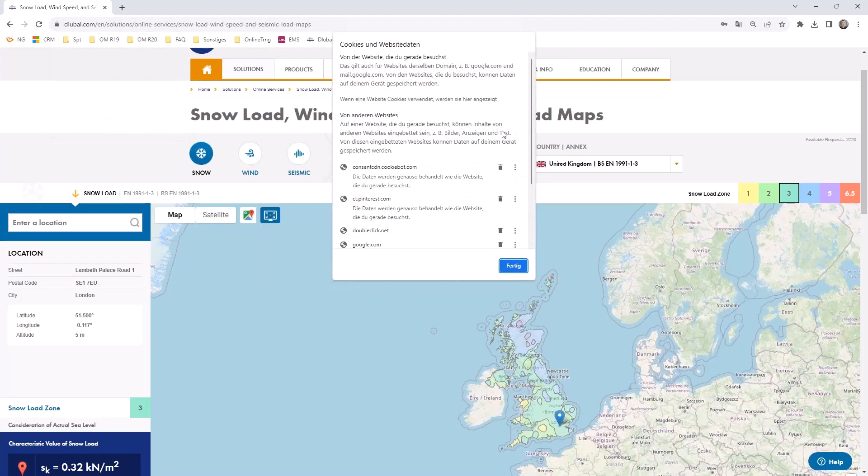So this is of course some data which is saved on the computer to quickly access a page, but it might be necessary to reload it. And then you can select if you want to allow all cookies again. And then the frame should load again for you if it did not do before.

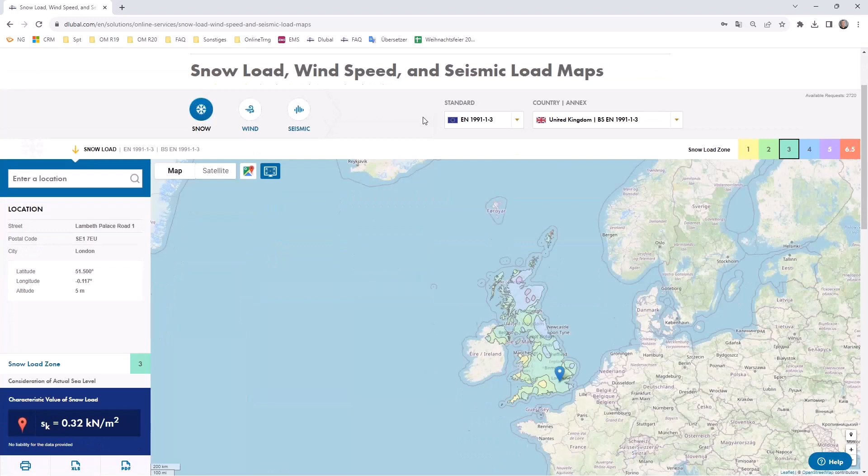So let me quickly sign in so that I will have enough requests for today. And let's go again to the snow load map. So I think you're already coming to it. It is not available yet for every map. I do not think that it is available for Great Britain. Oh, it is already. In my tests, it was not available. Okay, so we can use, for example, Great Britain with the Eurocode 1991-1-4.

And then you see the small button on the left bottom of the page, which is of course still announced as being a beta. So please double check the values if they are correct or not. You can of course do that in RFEM, or at least be suspicious if they might be correct. It's still in a beta mode, but we do not want to not present it. So you can think about using them.

So if you once click on the button, you can already see the three diagrams you can now gain. So it's not only about the basic wind speed. No, you directly jump into the map and parameters according to the Eurocode, and it will create the diagram over a certain structure height. So if you adjust it to 20 meters in here, you would see that the diagram will of course be adjusted, and you can as well jump into the wind profile tab in order to copy paste the values with the level.

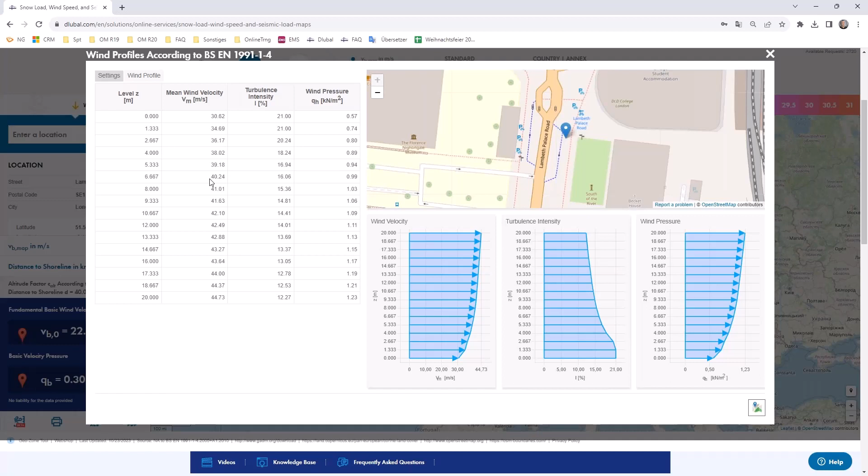What is then of course necessary if you jump into the RWIND main program for the definition of the wind profile and turbulence intensity profile. You can as well choose that you want to have a user-defined definition and adjust all the values you see in here. You also get a closer look on the place where you are. You can also switch off the map if you rather want only a big display of the diagrams.

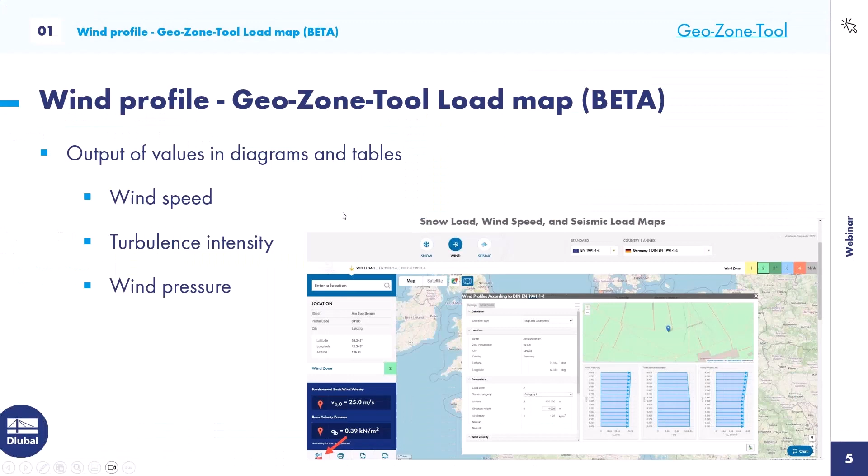So just once to remind you again, it's still in a beta phase, so it might not be available for every standard we provide, but this might be quite useful for you if you use RWIND without RFEM 6, or if you want to compare your hand calculations, or if you want to compare our calculations and tell us something might be wrong or not. So this was something not directly linked to RWIND.

So let's now jump into the main part, of course, our program RWIND, and this is my summary of the 4 features I would like to mention. Maybe you are not yet used to it, but you can also find all the data in our extranet. So if you log in with your account and you go into the development tab on this page, you can see features and also bugs. And this is most likely the place where you can inform yourself of what is new or what was fixed.

And if you then restrict it to RWIND, this is in German, depending on the language which is set in your account. You can see that these features were introduced into the 4th version or the 3rd version and so on. And you could also check the bugs which were fixed for the certain files.

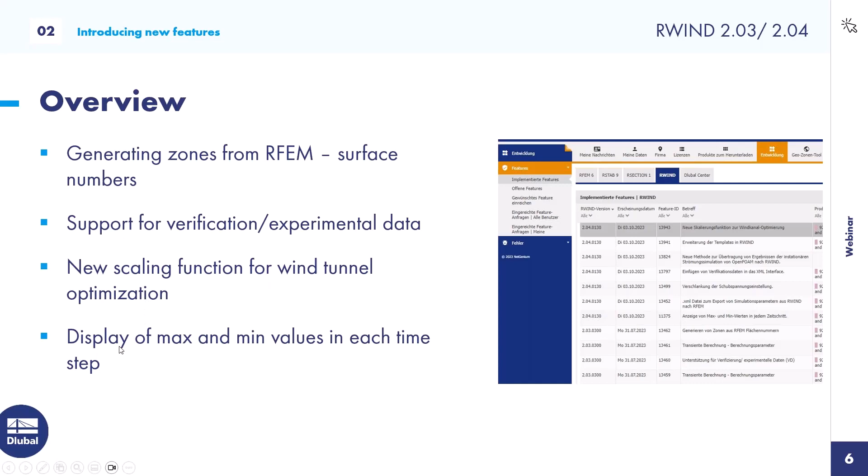So what I would like to talk about now is the first feature, the generation of zones from RFEM surface numbers. The next one will be the support for verification or experimental data. This will be the main part of today's webinar. The next one is a new scaling function for the wind tunnel optimization. And last but not least, we will quickly step into the display of maximum and minimum values in each time step. I have one slide for each feature, and then we jump into a small file in order to check where you can find it.

So you are now able to generate zones directly from RFEM surface numbers. Of course, only if you use RFEM 6 and then hand over the model to RWIND. We will now also hand over the surface numbering, and then you are able in the edit part of RWIND to generate zones from surface numbers.

So each surface, which you can of course split as much as you want in the RFEM main model, will create a zone, and remaining objects, so you may of course also hand over members, they will also have triangles. They will be assigned to zone 1. So of course that's a bit of a complication that they are assigned to zone 1.

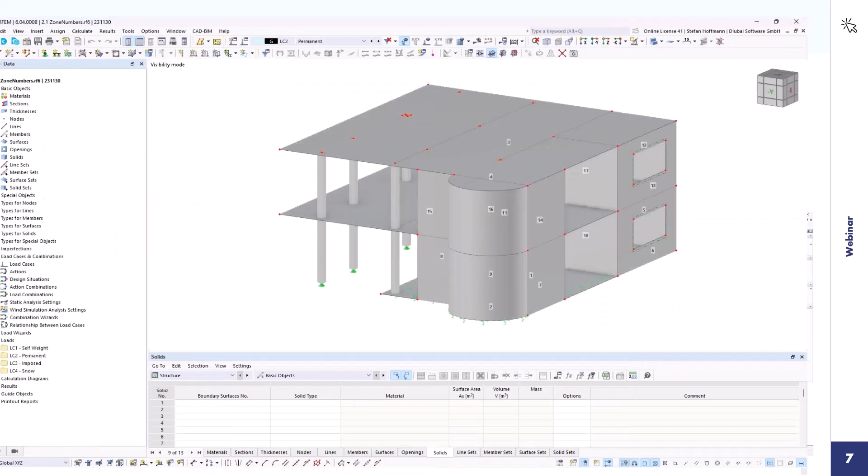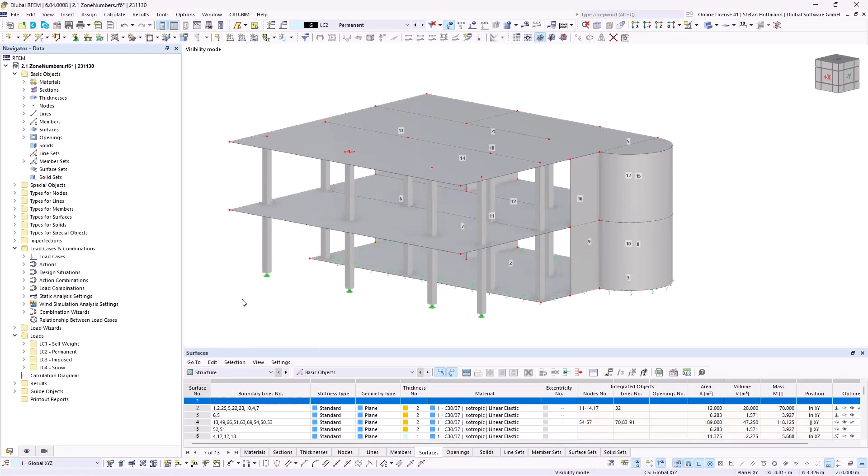But if we now step into my example file, which is also installed, it's the concrete building where I switched on the surface numbers. You can see that we have a surface number 1. And if you do not want that 1 also includes the member triangles, you just have to once go into the table and insert a row. So the surfaces will not start with 1, and all other things should be synchronized in the back. And now we have only surface numbers starting by 2, and all other stuff may be handed over to zone 1. If this is not fine enough for your differentiation, we will also see it in the main example later on. You might also right-click and divide surfaces with intersecting lines in order to create more zones.

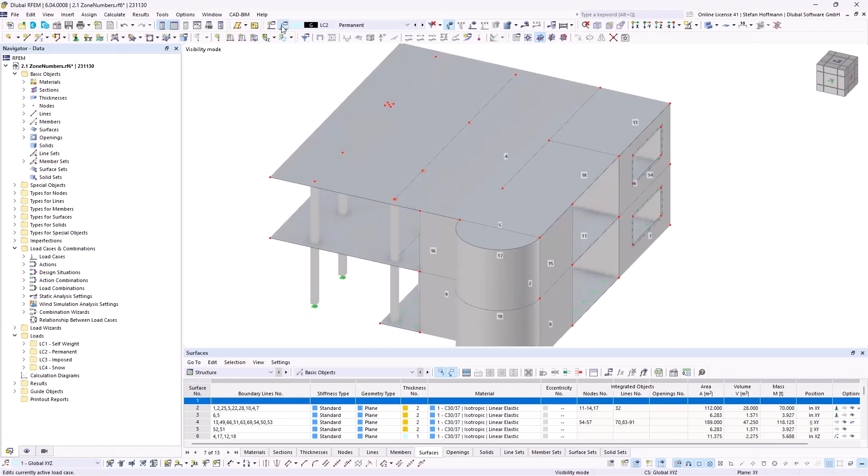So let's quickly create an example wind simulation load case. We will not care about any settings that are necessary. We will just open our model in RWIND, which can be quickly done by the button I used. So our geometry is handed over, and now there would be only one default zone. So it is possible for you now to hit Edit, Zones, and generate zones from surface numbers. So you quickly see that there are now a lot of zones created, and you do not have to do that manually. So you don't have to create a new zone and use the selection tools to gather all the triangles which might be necessary for your file.

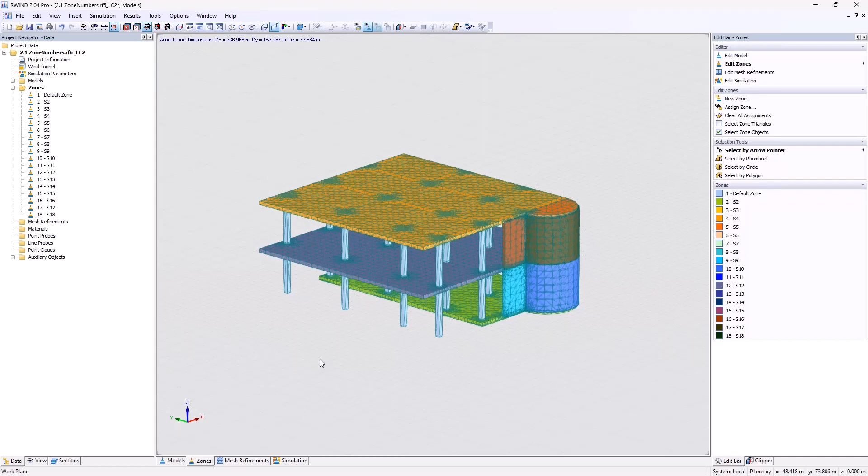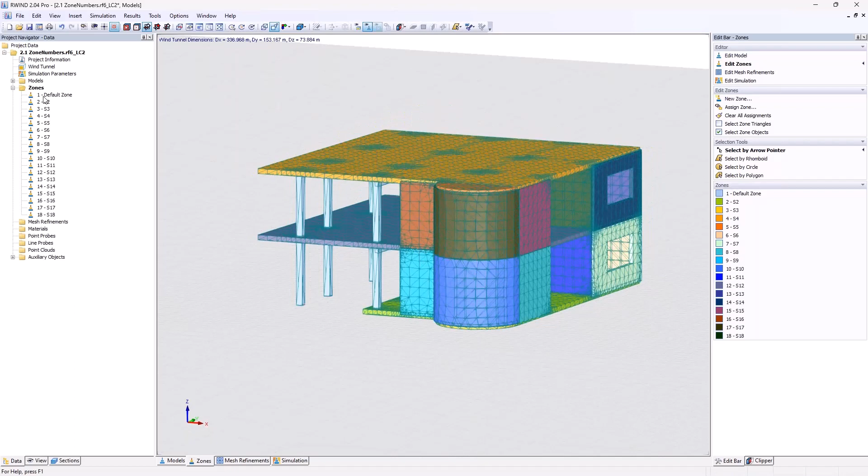Now, if you already consider the surface numbers or a certain division in RFEM 6, you can already directly create these zones in order to quickly evaluate maybe normalized pressure over a certain zone. I will later on show you how we will use it on our monopitch roof. And as told, you can see that there's of course also the default zone number 1, where you will then be able to find everything else which is not related to a surface number. Okay, so this was the first feature I wanted to talk about. We will use it later on in the next example.

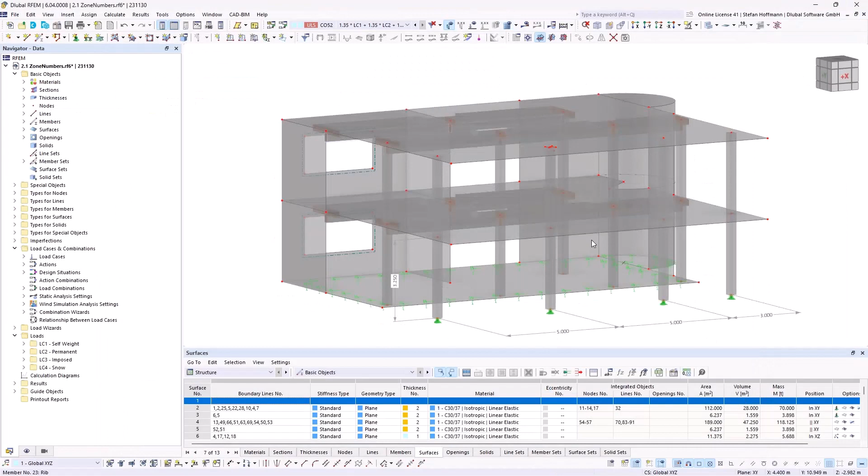So let's close everything and go back to my presentation. So the next one is the support for verification and experimental data. We now offer you the possibility to enter verification data into the table. This is currently linked to point probes and pressure values that you can enter. And you can then display the data in graphs using labels, so the normal point probe labels. But you can also do a graphical representation of the differences between the verification data and the simulation results. You can switch that in the result navigator. You can also choose the extrapolation of the data on the surfaces in RWIND using 2 methods, which are explained in the manual. And you can also restrict the verification data to be extrapolated to a certain zone. We will later on use that in my main model.

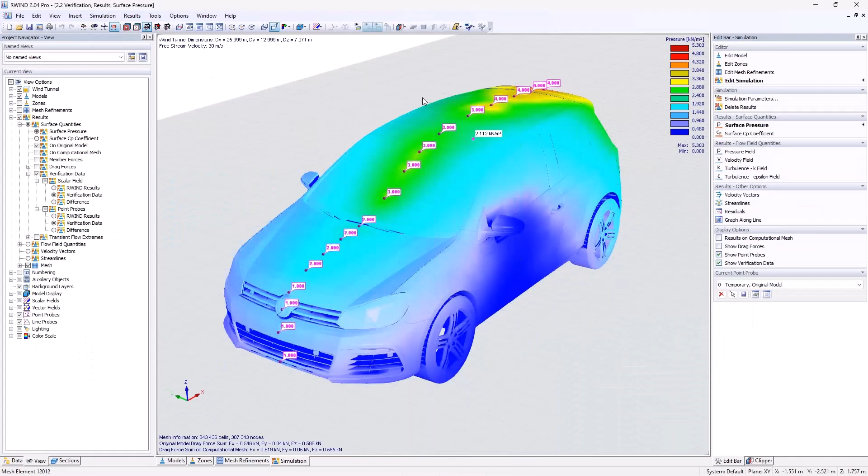But in order to introduce the verification data first, I use the Volkswagen Golf, which is an example installed already if you install RWIND. And I have already defined a point probe. I activated the option for the point probe. It might be, of course, a bunch of probes you want to enter if you want to define certain values for zones. We now only did 1 point probe, and if you activate the verification data, you will get one more table over here where I have entered random values. So they do not come from any tests. I just wanted to show you the labels so you can quickly see where they are and what they are doing. So then you will also be able to adjust the verification data options.

So you can choose the interpolation method, which is currently fixed for all point probes. So you cannot yet differ between Gaussian interpolation or diffusion, but you may set a different data range constraint for certain zones. We will see that later on in the other example. So if you do not know about Gaussian interpolation or diffusion, you can just hit F1 on the keyboard. And usually it should be linked, but maybe we did not yet do this.

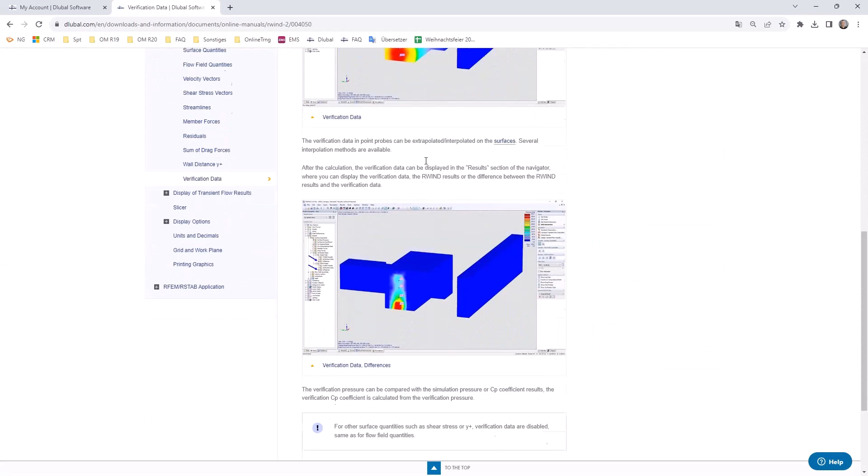So you can quickly, of course, search for verification, wait some seconds, do not wonder if you do not need to hit enter, and then choose the topic, which may be about verification data. So there is some general part of it. And if you go into the probes, we quickly search it, then you can see the explanation about both interpolation methods. So just scroll down and then you will find the information about the second interpolation method, or I think also about the other ones.

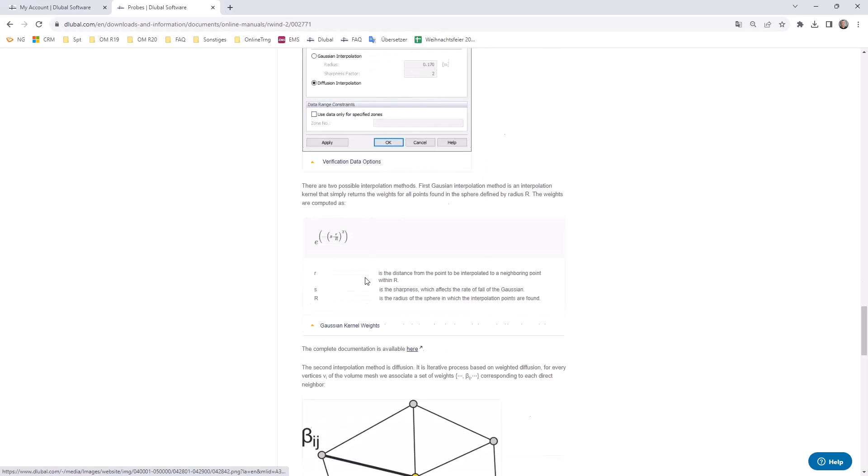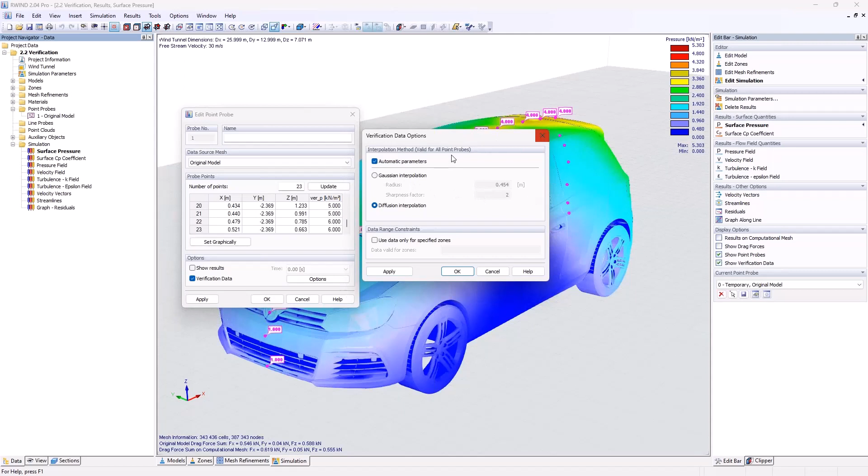Yeah, so we will not go into the theory behind it now. You can double check it if you are interested later on. What I do remember by myself is that this will most likely diffuse interpolate about a whole area in slides. And with the Gaussian, you can set a radius which will interpolate, but we will once again, of course, later on show that.

And if you have these results, you can always differ between the verification data of the scalar fields and the point probes. So you can step over and show the results you get from the numerical wind tunnel analysis. And then you can, of course, also switch to the verification data. And I think the biggest influence will be the difference. So you can directly check according to the colors how far our calculation is maybe away from the standard, which does not really mean that it must be far away from the reality.

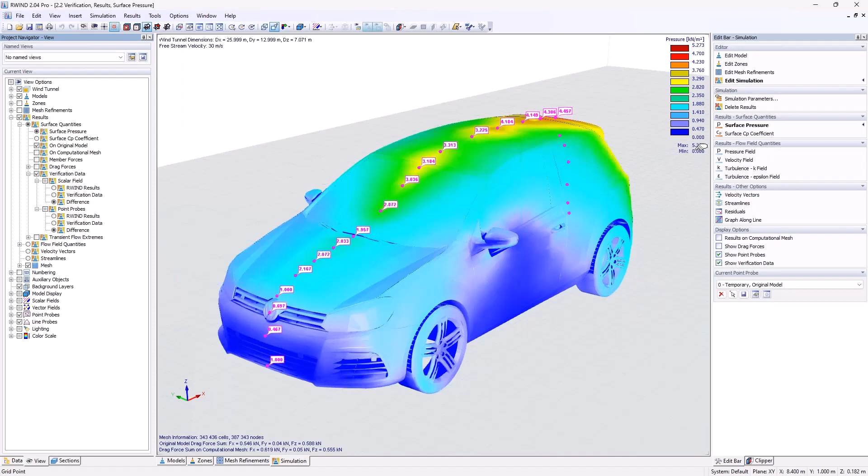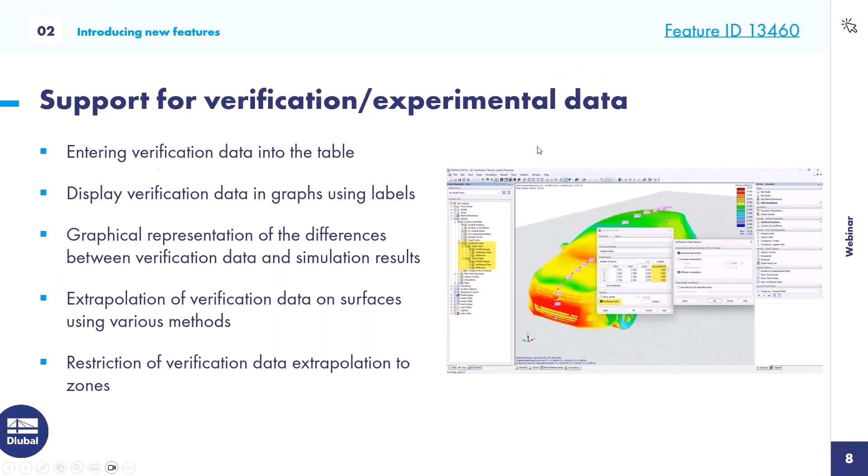So there's, of course, always the question, how can we verify our model? So from my proposal, every FEA analysis or also CFD analysis needs to be verified by a wind tunnel experiment. And then you can enter the data and check if the assumptions you make in this complex CFD analysis match with reality. All right, so we will later on use that feature, of course, once again.

So the next part is the new scaling function for the wind tunnel optimization. So you are now able to define scaling factors to automatically adjust the dimensions of the tunnel, and you will be able to save the user-defined scaling factors. So let's quickly jump into the example, which is once again the Volkswagen Golf car. And then you usually double click on the wind tunnel. So let's zoom out a bit maybe, and see these automatically adjusted values.

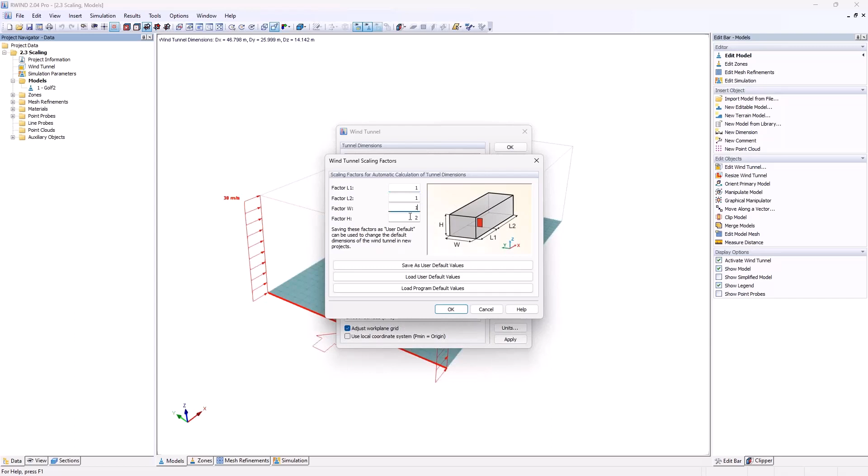And then there is a button of the scaling factors where you can now define your own values. Usually it is like this. So it is multiplied then with the normal values you have in the program. So this is the wind tunnel the program will offer you. But we propose, if it's going into a more detailed calculation, a recommended wind tunnel size.

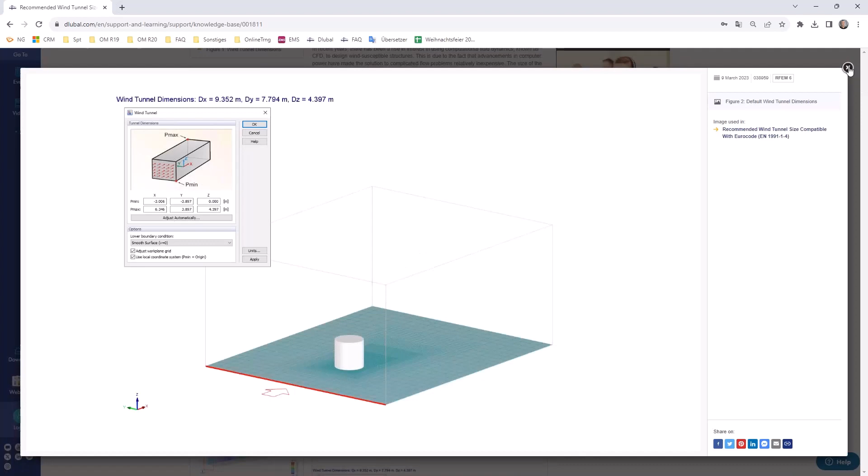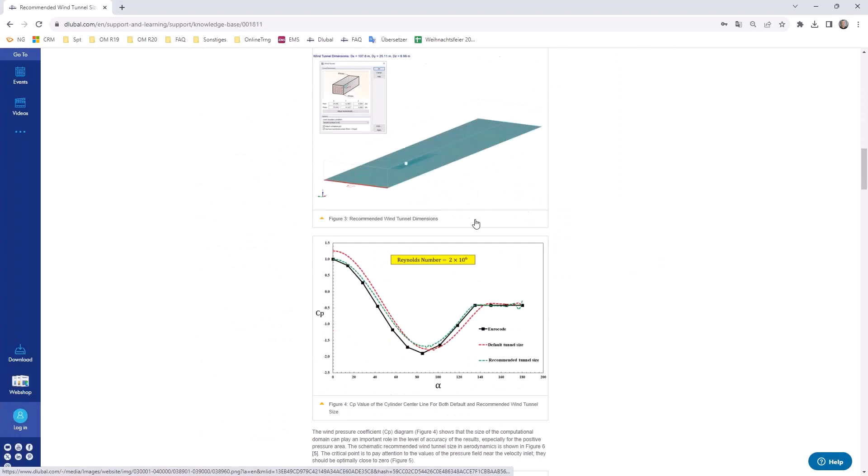I did already once mention this technical article by Mr. Katsemian in a different webinar, but I would like to once again put some effort into it, that it is quite necessary to think about the dimensions. So if you compare the standard dimensions to have a quick estimate of the wind load pressure and the size we would recommend, which is of course then extending the calculation time a lot, if you want to compare values to the Eurocode, you can see that the size will be much bigger. And I did, of course, a quick estimation of what the values should then look like.

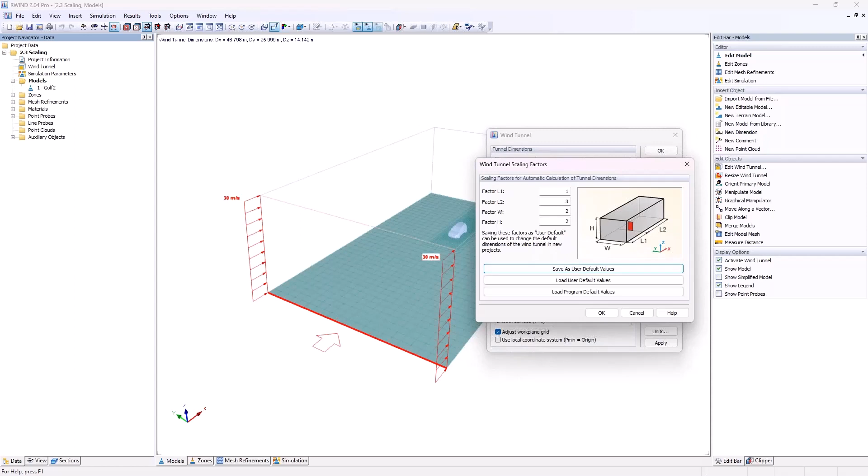So if you would like to match the technical article, I do not like numbers with comma, so it would be 2.7 in this length, 1.6 in this direction, and 1.85 in this direction. I would use 1, 3, 2, and 2, hit OK. Then you will be informed that these are just the factors used, and you have to use the adjust automatically button once. If you then hit OK, you can see it did not change a lot because I think it was already bigger in front. But then your wind tunnel will be adjusted according to the factors you enter in here.

So if you put 10 inside it, say OK, and adjust it, then you can see that this factor is going to be increased a lot. And then this will offer you the possibility to not think a lot about meter values, but to quickly enter the factors you would like to use, save them, load them, and apply them on your model.

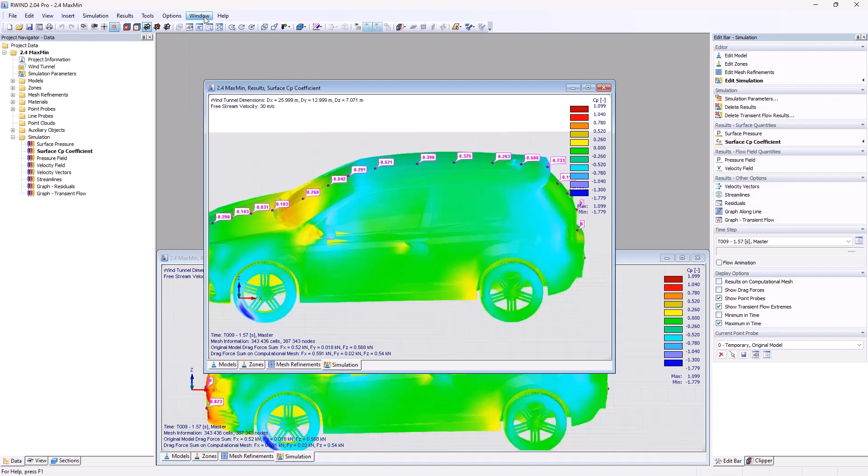So the last feature I would like to present today is the display of the maximum and minimum values in each time step. So this means it is for the transient calculation, limited to our RWIND 2 Pro version. And it will offer you to have some kind of envelope for surface pressure or CP coefficient values. So let's jump once again to the golf car. There's also a transient calculation file for the golf car.

So what it is about now is that usually if you show the transient flow results, you will have a slider over the time where we can see, most likely on the back part of the car, that the pressure will of course change over time, due to the wind acting, of course, turbulent. And then it would be kind of hard to evaluate where will be the maximum suction or the maximum pressure.

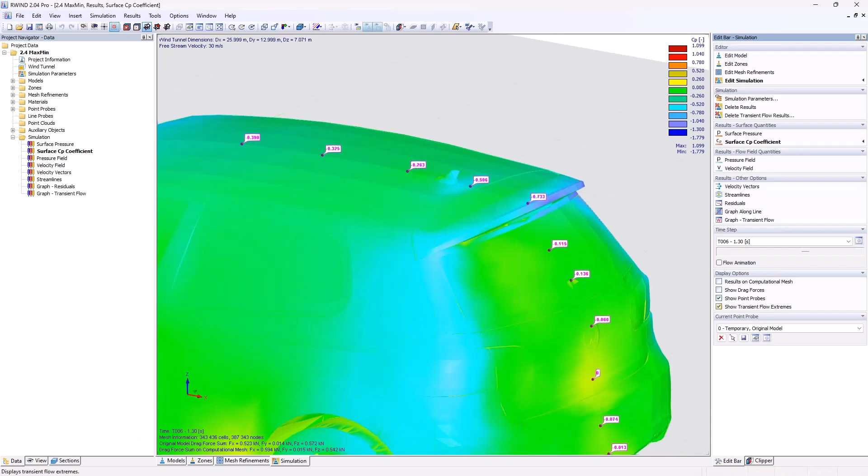Or if you are lazy and you don't want to check that, you will now be offered to show the transient flow extremes. And if we use two monitors, we can once show the minimum in time, which might be minus 0.814. So it's of course the minimum with a minus. And we can then also choose to show the maximum in time. So this same point probe would be in a transient calculation over time, gaining the values of minus 0.733 or minus 0.814.

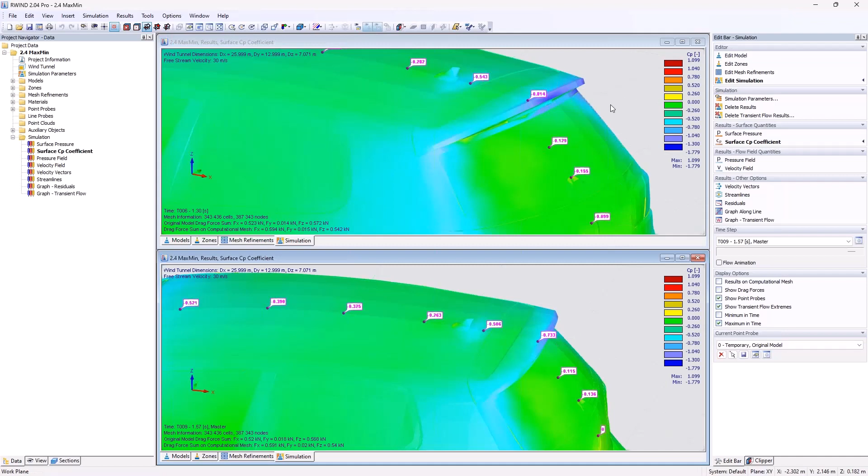So this is one way to determine the maximum or minimum values for your structure or your file. You can, of course, also switch that value in the view navigator, but I think the quickest way is to do it on the right. Okay, so this was kind of a slide presentation, but was also stepping into the program.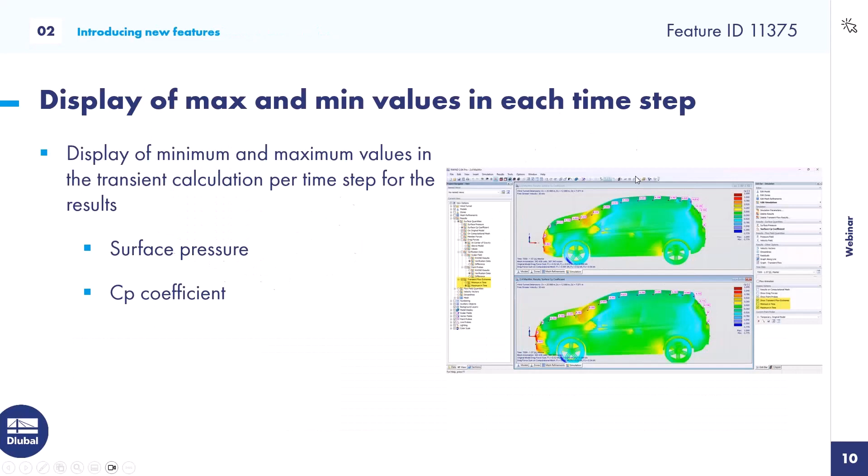And now I would like to show you how we can use the feature of the verification data on an example. So it's a building, it's 10 meters long, 8 meters wide, 4 meters high, and it has an angle of the roof of about 5 degrees. So it's a monopitch roof, and we will apply the zones for monopitch roof. If the wind is going into the main X direction, there will be 3 zones. So the F zone, G zone, and H zone according to the Eurocode. And it will be divided into these parts.

So we will use the generate zone function in our model. And we should get these zone dimensions. So I have stolen them from the wind load assistant because this is a known example type of roof for the Eurocode. And it is supposed to have these pressures on the certain zones. So we will start with a fresh model in RFEM 6. So let's give it a name. So it's the name of today, and it's called a monopitch.

And we will not do any design of elements. So it's just really about giving our model into the wind simulation analysis and gaining the pressures of it. So I will only activate wind simulation. I could activate all because I'm working for Dlubal, so I'm not limited to any add-on. And we will do it according to the German national annex, because we are quite used to doing so, and we also tend to present our English webinar for the German annex.

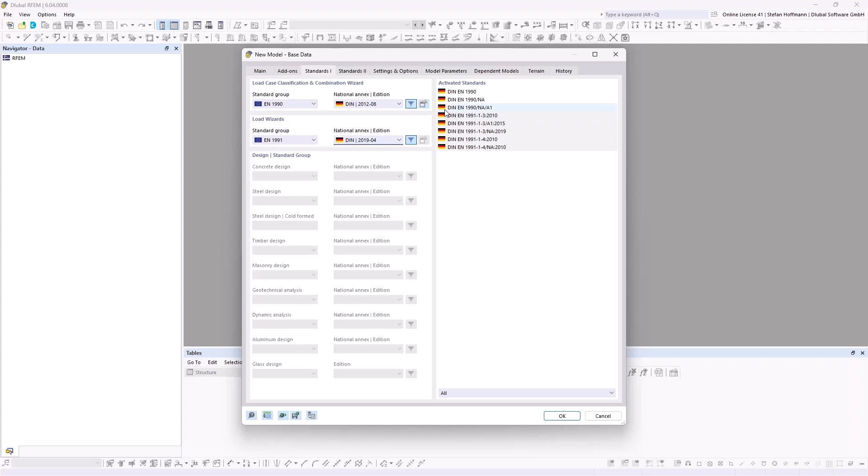What you can now as well do is choose already a location in the GeoZone tool if you want to. We will do that later on. And you could also define a terrain. Just remember, it is possible, but since we would not like to have any influence by neighborhood or by the terrain, we just skip that. So once the file is loaded with all the data used before, remember that the first angle of wind simulation load is going into the global X direction. So I tend to rotate my model because I dislike rotating the wind load.

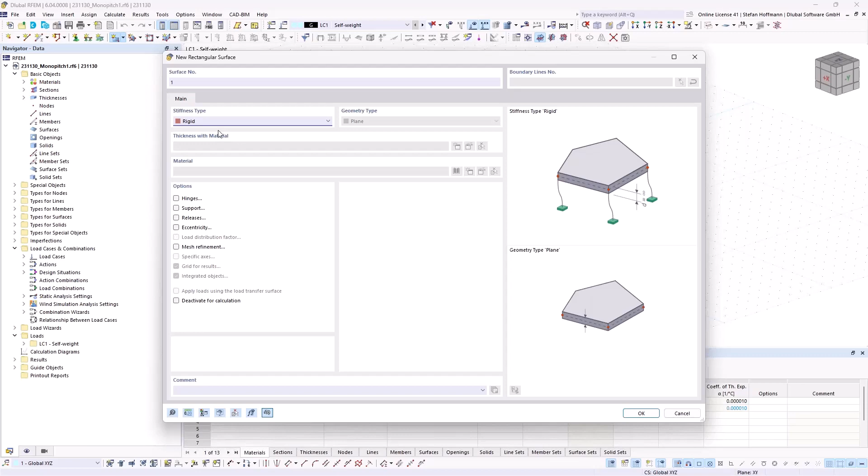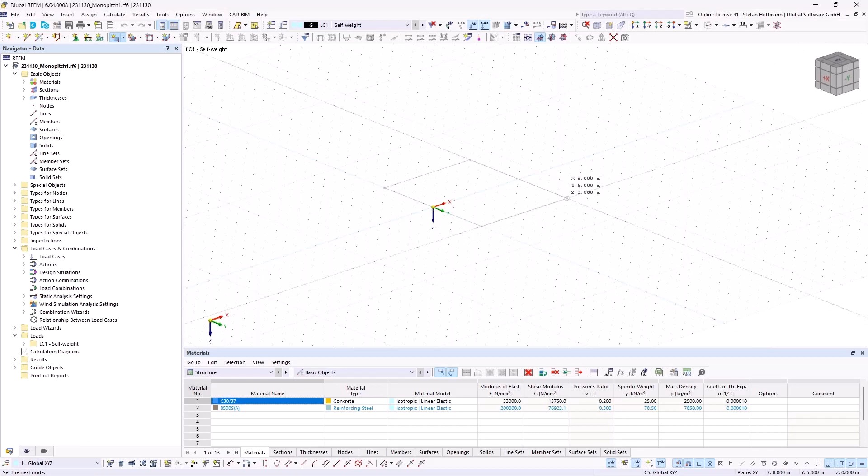And I will now start by modeling the bottom plate. So I will simply use the rigid type, because I'm only interested in my wind load on the structure. I'm not interested in any design yet for the building. So it does not matter if it's concrete or metal. We can just use rigid because I do not account for any stiffness. So now I told that it is 10 meters times 8 meters. So we would now need to define this size in our program. So I'm starting at minus 5, and we're going to 5 and 8. So this will be the bottom plate.

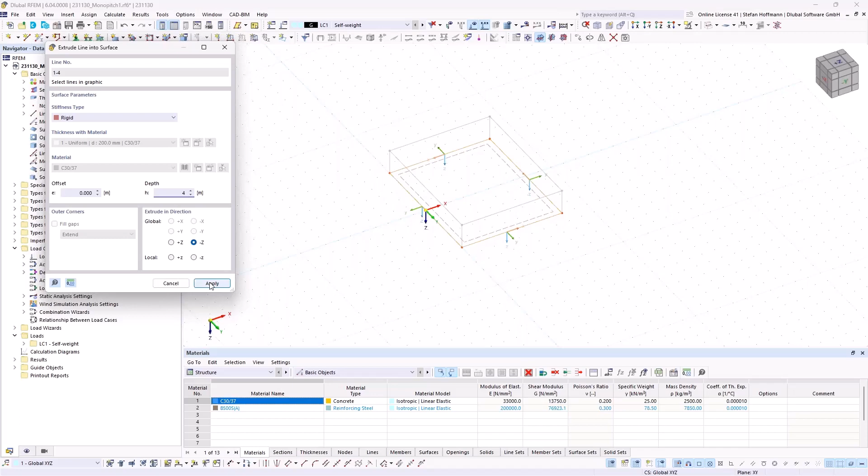Then we can simply, with the control key on the keyboard, mark all the lines, hit a right click on them and extrude them into surfaces. This will offer you the possibility to quickly model a surface. We will once again use the rigid type, and the height should be 4 meters into minus z. Okay, we apply that. So we most likely have already our hull.

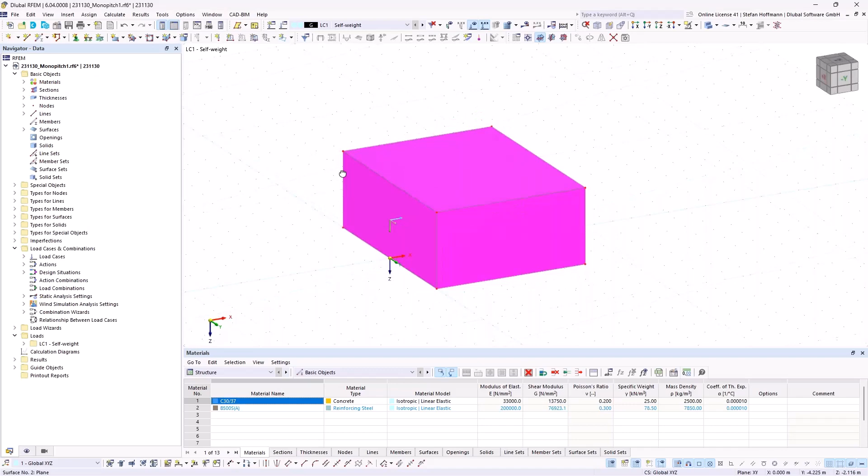You can of course switch into this display if you like it even more. And then I would just mark my bottom surface and copy paste it with the control keyboard and snap it to the top. We of course need some boundary conditions at least. So I would just apply some line supports, being some singular foundation on the length. And then it's of course about to define the angle.

You can quickly do that by simply hitting the surface and use the manipulation tool to chamfer it. So you can now decide that you want to chamfer it, for example, 5 degrees. Due to our wind load assistant, I use a 5.01. And then we need, of course, to think about what will be the direction. So it is about our y-axis. So this is the turning point, and it should be into the z direction. So we want to have it into the global z direction.

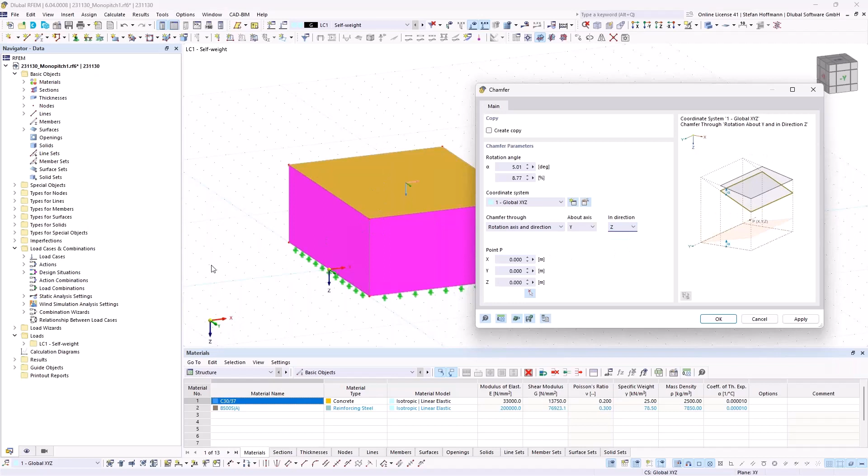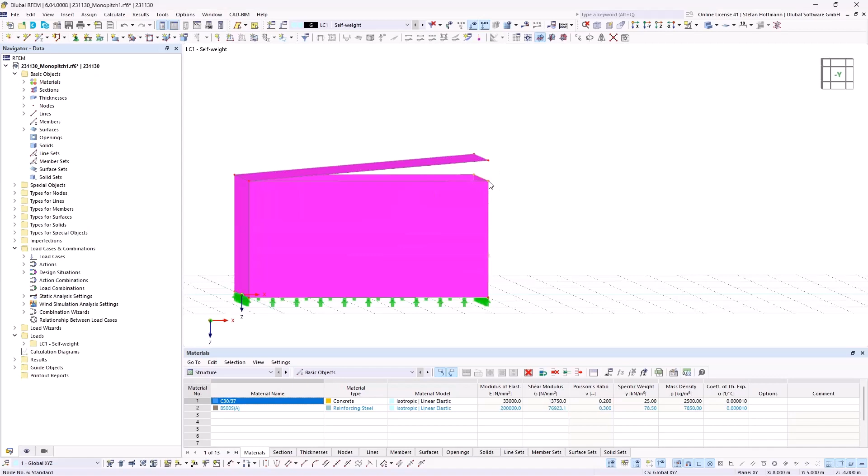Since we use this point already, you don't need to choose it, but we can of course once choose a node in here. And if we hit OK, it is moved. Since I only selected the surface, all other combined elements are not moved. So we could simply before mark everything, or we now just mark both nodes and drag and drop them to this position. And then you can see that the surfaces are quickly adjusted. So it's quite smart if you would like to model. It's close to a CAD design, I think, that you can use, of course, drag and drop and so on.

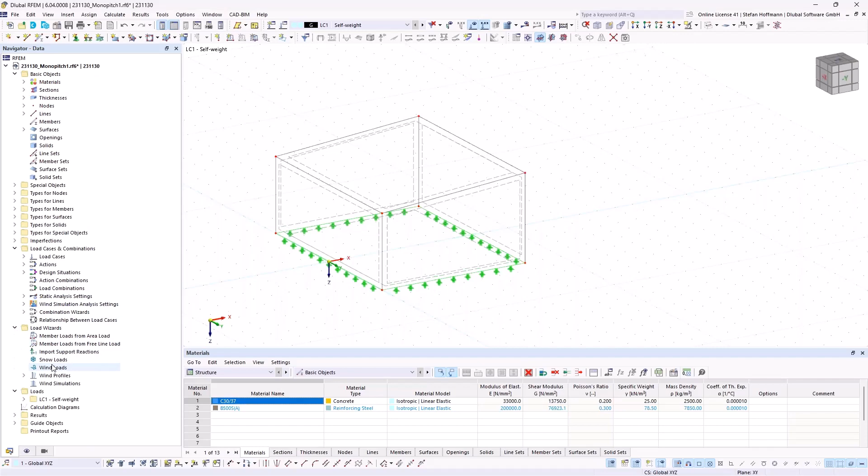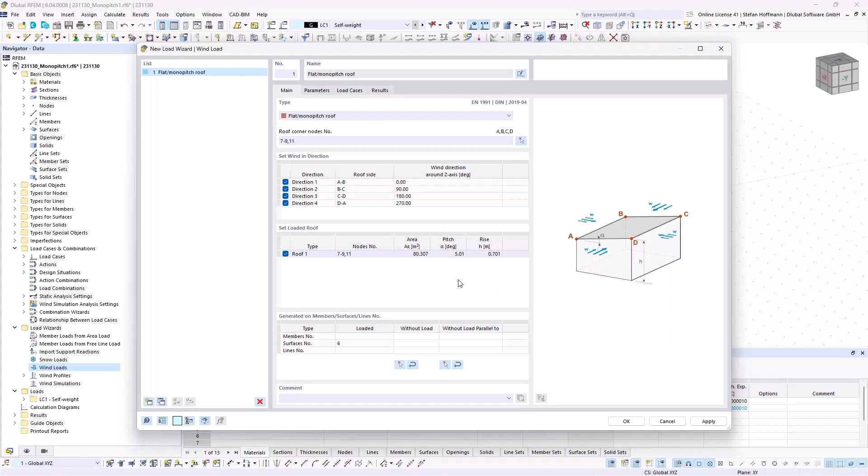So the next thing we would like to do is, of course, to check the wind load areas. We can do that with the wind load wizard. This is not RWIND. This would be the standard approach. And we are now only interested in the mono pitch roof. And then you see the picture, what 4 corner nodes you need to choose. So we simply pick our 4 corner nodes and hit OK. And then we introduce the parameters.

So now I hit the button to jump into the GeoZone tool, and I will use the location of Leipzig. It does not matter where we are. You can see that the German standard will choose the wind zone 2. I will load all the data. It will gather all information from the GeoZone tool, so we do not need to enter them manually.

And then I can adjust the structure height, which is roughly 4.7 meters, and we will use the terrain category 2. If we do that and create all the wind load cases, we can quickly estimate the results already. So you see the load directions and you see that our zones will be split.

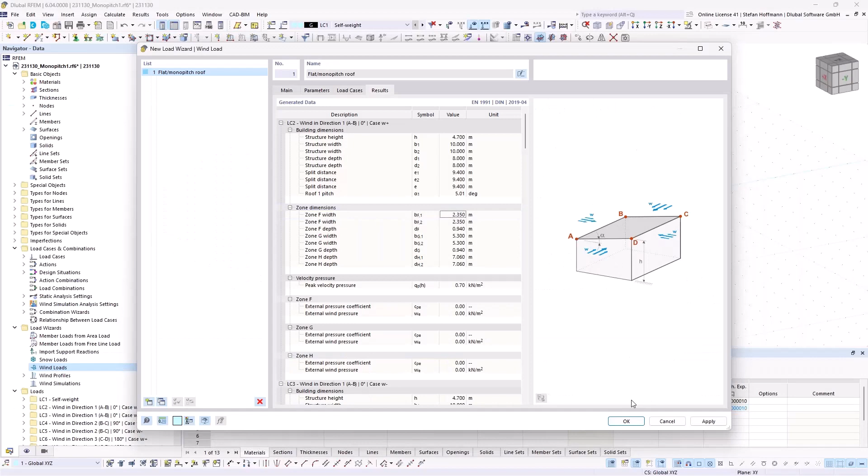So if we jump quickly back into this part, we will be given all the data what the standard will give us. So the width of the zone F, so e divided by 4 is 2.35 meters, and e divided by 10 is 94 centimeters. So you will be given this information. This is why we do it as well shortly with the load assistant. And if you display it, you can see that this is the load or the suction we are going to experience in our wind, and we will then check it.

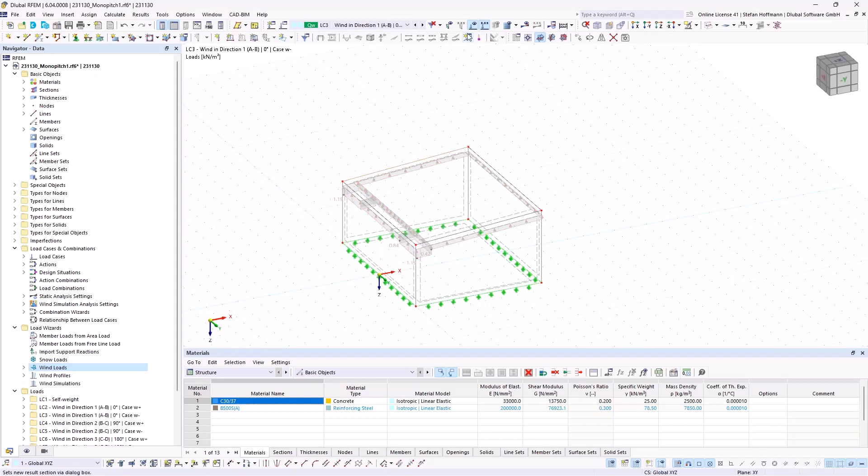So let's continue. So what we now want to do is that we already define now zones. So we would like to split the roof into parts. For that, we would like to have our lines showing into the same direction. So now we can use both lines, hit the right mouse button and divide the line via distance.

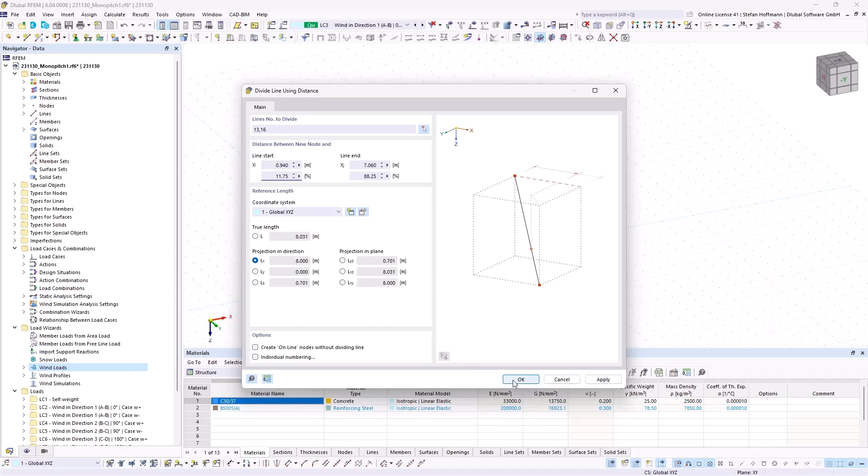So now we could just simply enter 94 centimeters, but it is meant as a projection showing from top. So you are now able, of course, also to use the projection of the line into the local X direction. You can enter 94 centimeters in here. And if you do that and hit OK, you can quickly divide the line using it for further modeling. We will now simply draw a line into here and have now the line which is going through, and then I told that the distance will be 2.35 meters.

So we will use this line and also divide it with a distance. It's not about the projection or anything, since it's the same if we use it, and split the line at 2.35 meters. We will also divide the line at the distance at the end, 2.35 meters.

So if we now have it, we can simply mark this node and copy it from this point to this point in order to have it. Or you can, of course, also try to hit the tool in order to snap the perpendicular part. I'm not sure if I activated it, so I'll just use this line and copy paste it over here.

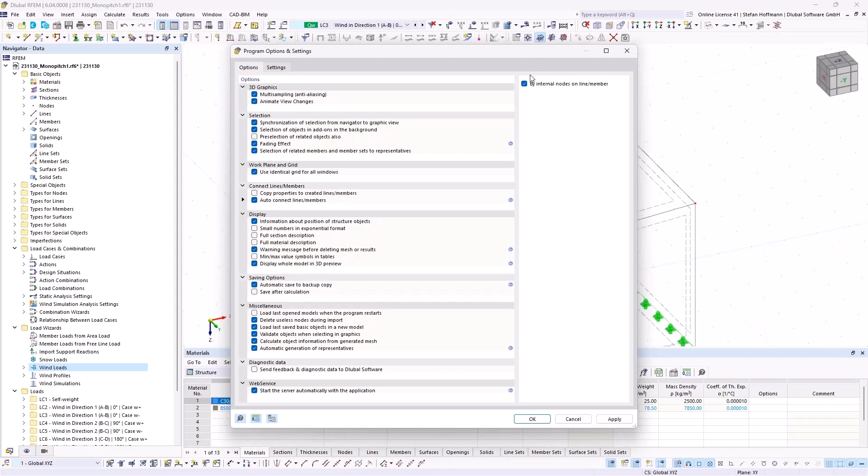If you are curious why maybe there are red nodes or blue nodes created, so if the line divides or not, you can step into the program options and choose the setting for what it is supposed to connect, members or lines. If you do not manage to do so, you can simply later on use this function and check if the lines will be divided.

So the last part we need to do in order to have certain surfaces is to right-click on the roof and divide the surface with intersecting lines. And voila, we now have 4 surfaces for the top, which will give our 4 zones as expected, which is what we would like to do in order to compare it with our experimental data.

So this is a way. This is one possible way. If you have a quicker one, of course, you can also use your own way of modeling.

Next part we need to do for the wind analysis is to step into the mesh settings in order to check what wind simulation options we would like to use. You can think about the level of detail or the simplification of the model, and whether only visible objects should be handed over. Since we do not have members, we can just deactivate this option.

We will also not hand over any terrain. We will also not hand over any surrounding models. Let me shortly drink something. And we will also not keep the wind simulation results.

Since we use rigid surfaces, we do not need to think about surface thickness. Running RWIND in silent mode is mainly supposed for when you have a lot of load cases and you do not want to double check them and manually start the calculation in RWIND.

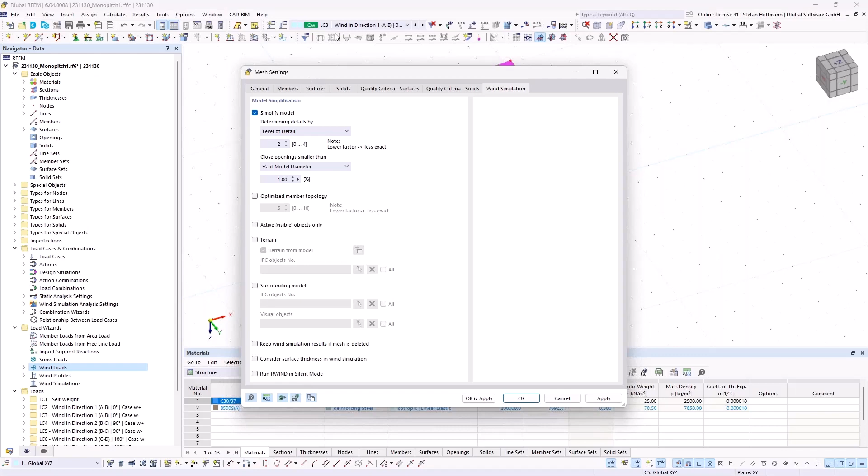You can disable this button, and once you calculate a wind load case, RWIND will open and you will be given the option to adjust everything you would like to do, if you want to double check the model and then start the wind calculation by your own.

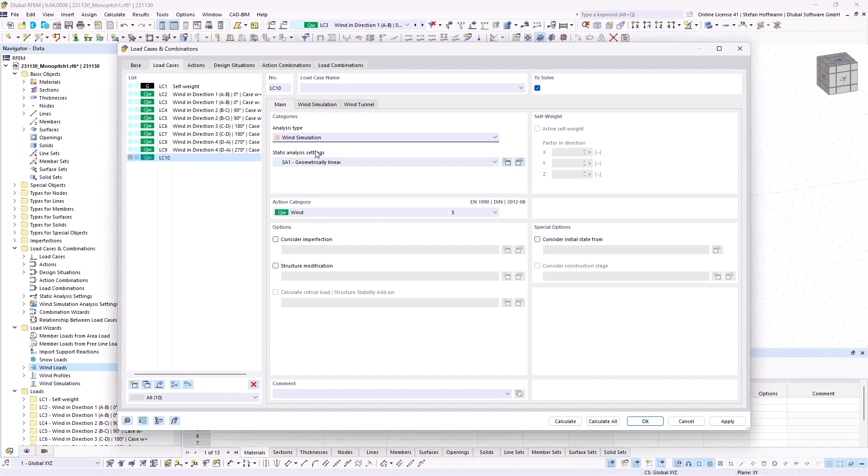The next part is that we need a new load case, of course. So it will be the action category wind. It has to be the analysis type wind simulation, and then two registers will open on the top. There you can choose further settings for the wind simulation.

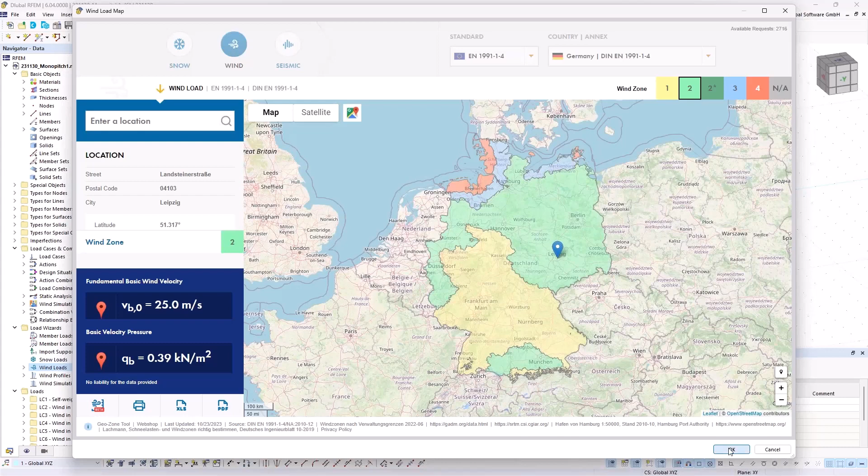So the first one would be the wind profile. If we step into it, you can see that this is, of course, once again related to a certain destination. So we check again Leipzig in order to load the data inside it. You can also manually define it if you want to.

We would just change to category 2. The height is taken automatically by the program. We will not adjust any other factor inside this. And there you can already see the profile, which should match with the ones I showed in the beta phase. But due to the beta phase, there might be still some adjustments.

Using this button, you can switch between the turbulence and the wind profile, or you could also be able to see the wind velocity given in the tables.

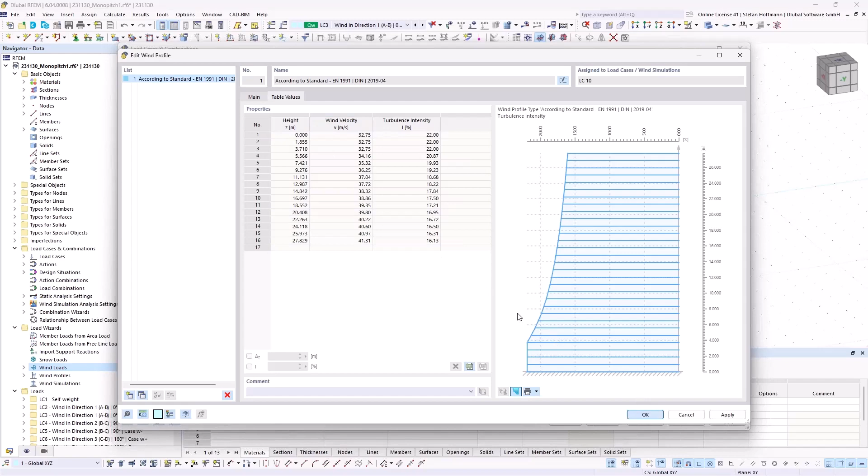If we defined it, the last part would be to double check the wind simulation analysis settings. So if you would like to do a basic steady flow calculation or a pro transient flow calculation, this is always up to the structure and turbulence you are expecting. We will simply do a steady flow calculation.

RWIND did provide a lot of verification examples and also a lot of nice-to-know facts for maybe beginners in a CFD analysis, because we offer a tool with a quick estimation of results. And there are still technical parts behind it you may be curious to know about.

There are other things you could adjust, but we will just leave it as it is. So if we would now hit OK and start the calculation of LC10, you will see that it will hand over our model to RWIND. It will start RWIND.

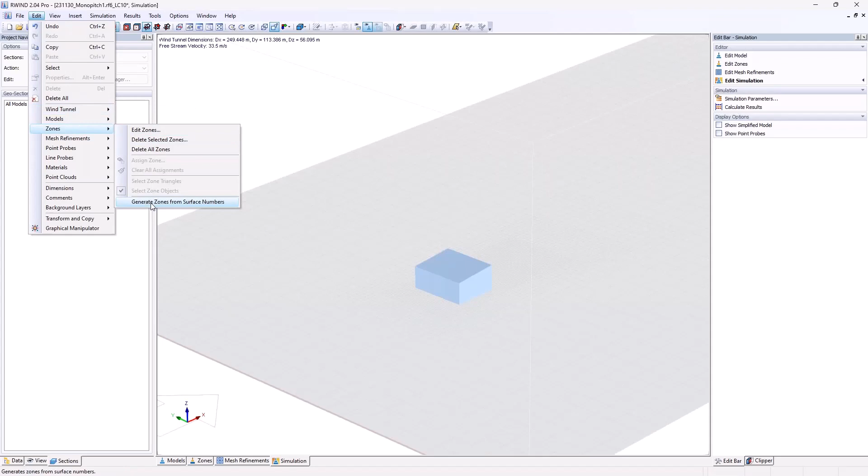And we would now be able to do the stuff we would like to do. Currently it would be necessary to manually generate zones from surface numbers that you can later on use. We are planning that there should be an automatic option, because usually you might like to automatically create zones.

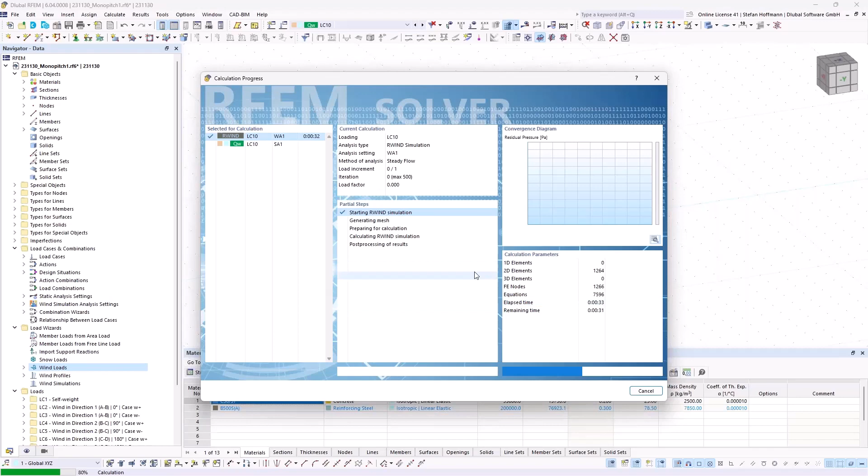If everything is done, we could now start the calculation, but since this will take 5 to 10 minutes even for this file, I will not do it now. I will open my already calculated file. RFEM will give me some error, but I did already run the file for you.

So let's make a jump into time. 10 minutes passed. We now already have our results on the model. Let me quickly just delete the line probe I already defined in here. We already have our zones defined.

So our zones, I always have to double check. Zone 7 is the big part H, 8 and 9 is F, and 10 is G. I hope I will remember it. If not, I will have to double check again.

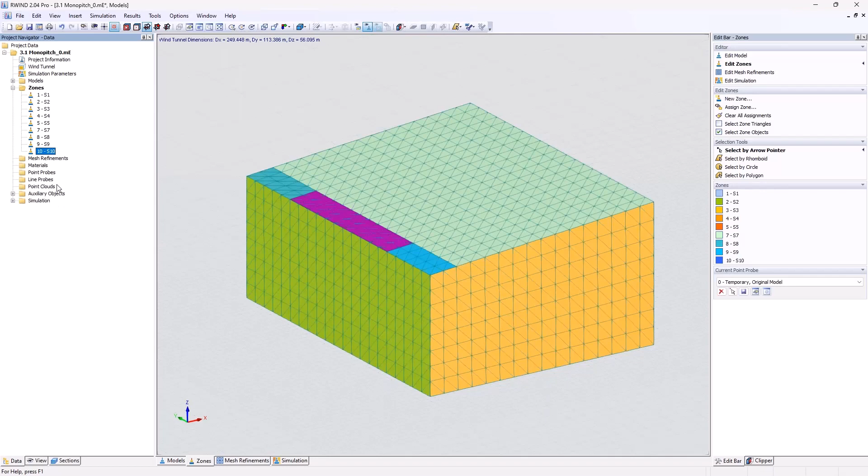So what we are given now after the calculation is, of course, the pressure for our front and our roof, sides, and so on with certain values. And now if you would like to compare that to different standards or to your own analysis, we will define a new probe.

I will name it F for the zone F. This will be these small parts in our model. And then we will define it on the original model, sorry.

So the original model - if you are curious about what the model measures are about, there is a big chapter in our online manual, because this is one main part of RWIND: we give a maybe non-topologically correct model from RFEM into RWIND.

It will create a fine mesh for the CFD analysis and transfer back the forces onto the model. So let's start by setting point probes graphically. We are now only interested in the roof.

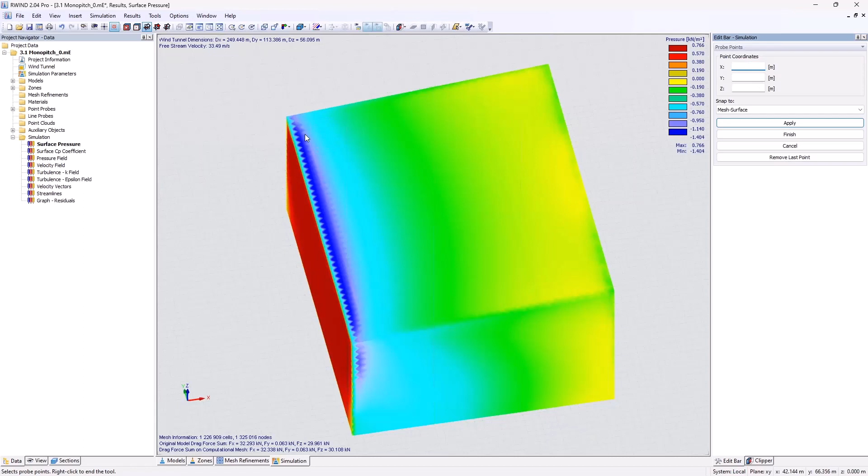So the part F, I will use 2 probes over here. You will see them soon. I hit finish, and then I will quickly switch to the RWIND results, because it was still set that we show the verification data. And then we can see that we have those 2 point probes giving the results at this point for our zone.

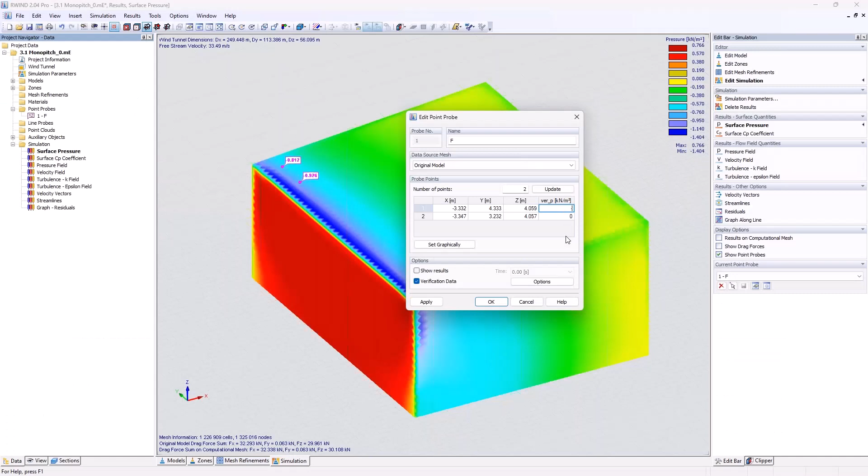And if we now would like to introduce verification data, we just apply this button and we will check what the standard is thinking of. So it's minus 1.19 kilonewton per square meter. Let's enter minus 1.19.

And quickly check that this will only be used now for zone number 8. And let's use the diffusion interpolation, say OK, and let's quickly switch the data to the verification data, because I think this is a smart way to see what the logic is doing behind it if you enter these probes.

We now inserted 2 probes for the zone. We restricted it to be only interpolated in this area. So what it tries to do now, of course, is to keep the minus 1.19, and towards the boundaries, to the other surfaces, it tries to interpolate.

We will now introduce some more points. I will just enter one more in the other area, say OK. We go in there, it already has the latest value.

And if we would switch now to the Gaussian interpolation with a radius of 0.72, hit apply. Let's put this window in here. We will see that nothing is done in here. Keep in mind, we restricted it currently to zone 8.

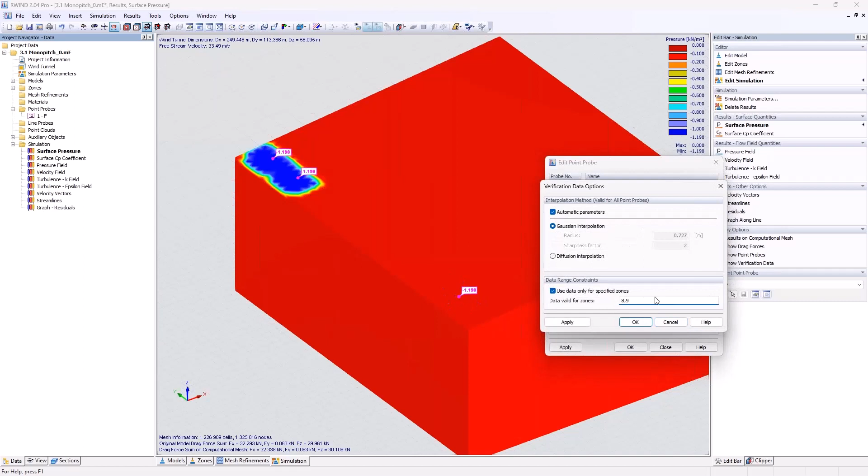We can also restrict it to zones 8 and 9. And then we see that the interpolation is done in a bit different way compared to diffusion. So with diffusion, it is using a wider area, and Gaussian is using the automatic parameter defined in here.

So it's a radius around the dot of 73 centimeters. We could also uncheck the button and increase or decrease the area. It depends on how many probes you would like to set.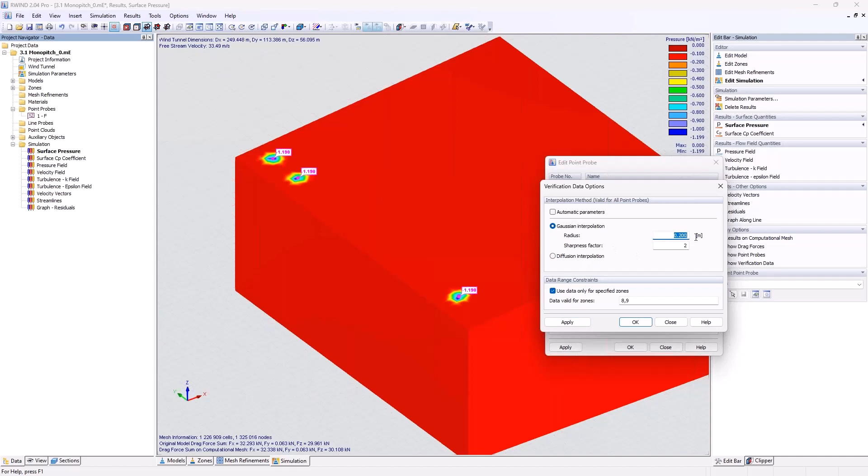In a normal wind tunnel analysis, in reality, you have a certain amount of probes over the height. Since this would extend my webinar to more hours to introduce such an amount of probes, we will only use 1 probe this time, and we will increase the radius, for example, to 3 meters, because this way most of the zone will be covered by my defined verification data, and all the other stuff will then be interpolated.

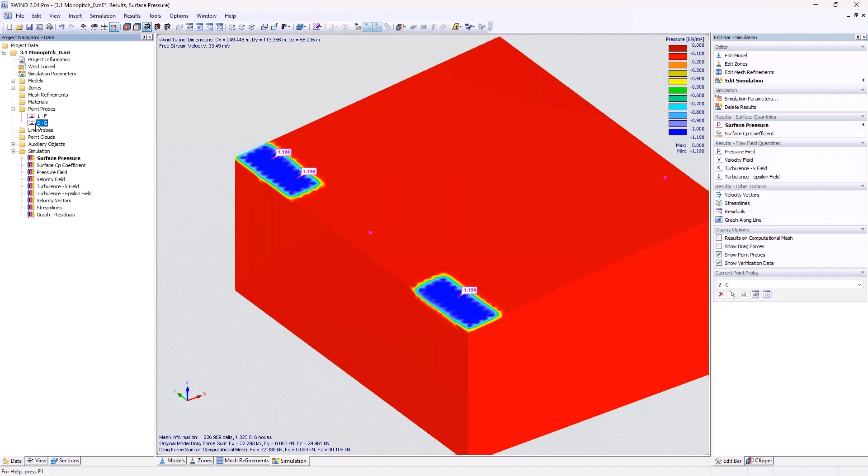So we will set a new probe for the next area. This would be G. We will set it graphically, once again only using 1 dot. It will be more usually - so I set 2 by mistake. Let's only keep the first one we used. You can also later adjust the values here if you need to.

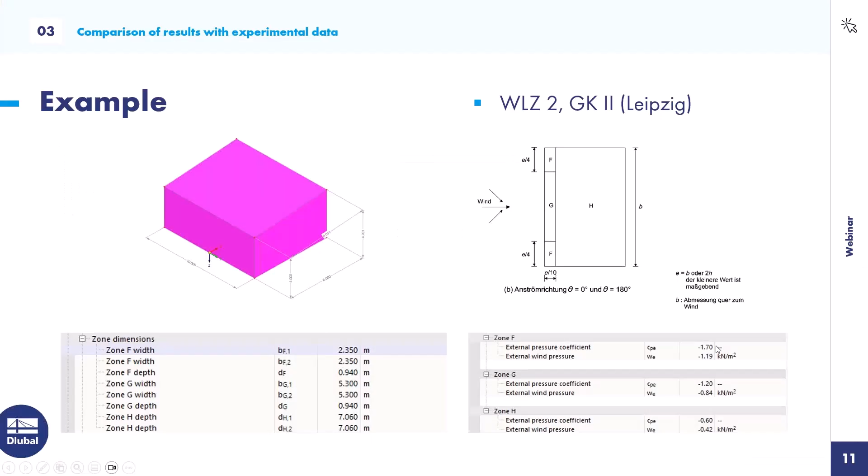And we will now once again define the verification data for this part. Let's jump back - it should be minus 0.84 according to the standard. So let's enter it. As you can see, this part on top is limited for all probes, and we will define this probe only for part number 10. Then you can see that it will interpolate between the zones a bit better than before. So now we have already defined 2 parts.

So let's enter our last probe, which would be about the H area. Once again, I only set 1 probe over there. We define the verification data, which is supposed to be minus 0.42, sorry, and we assign it only for zone number 7.

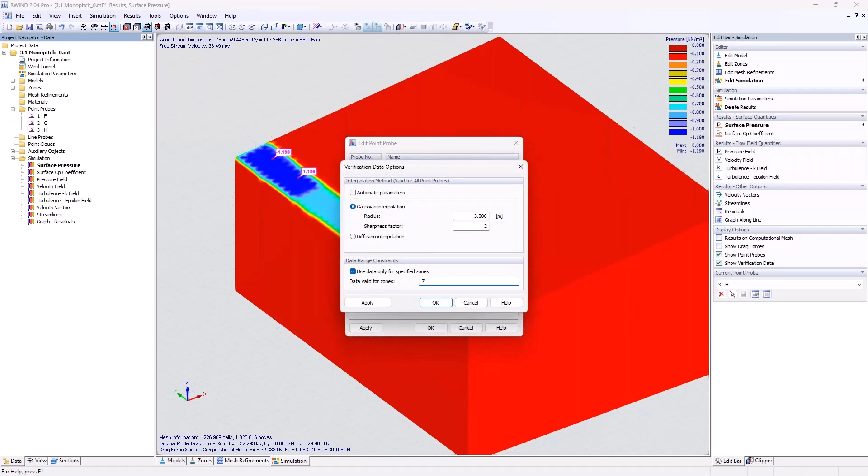If we hit apply, we can see that our radius is, of course, since the zone is about 7 meters by 10 meters, way too low, but it doesn't matter. We can increase the factor here, for example to 6, to extrapolate our value to the whole zone.

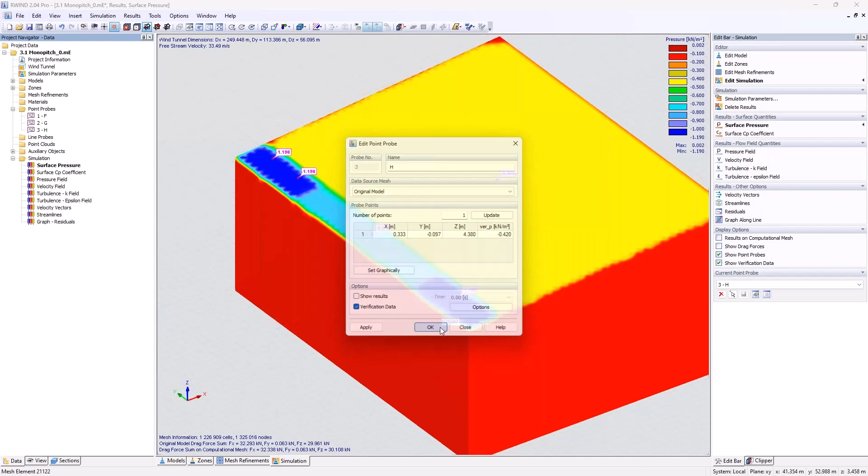So if we did that, we now have a smart graphical representation according to the values. Of course, the standard is offering some summed up value amount for the zones, so you would only have yellow, blue, and light blue for the zones, which might differ from the reality values we achieve.

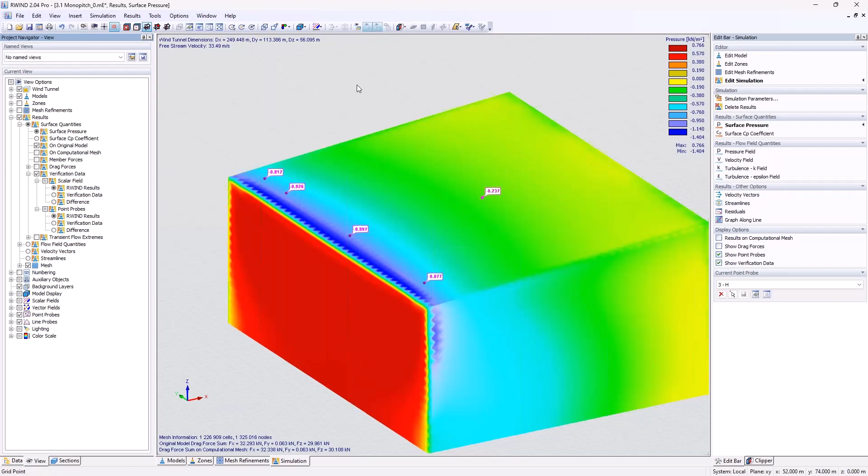And now we can go into the View tab and say okay, these are our RWIND results. You can see the probes also show the values RWIND is giving us. This is the verification data, and now, big drums.

We can now also check the difference about it. Let me quickly restrict our zones only to the roof - you can do that usually in the section tab. Then we can see that dark blue would be a difference of 0 most likely, and the wider away we are, we will have a bigger difference.

But of course, the standard is not really taking into account maybe a finer determination of an area, so we might have some bigger differences to the standard.

What I did not do is a long calculation. So what I did is use the recommended wind tunnel size, but only a model simplification factor of 2. So this is not the best calculation giving the best results, but some quick results.

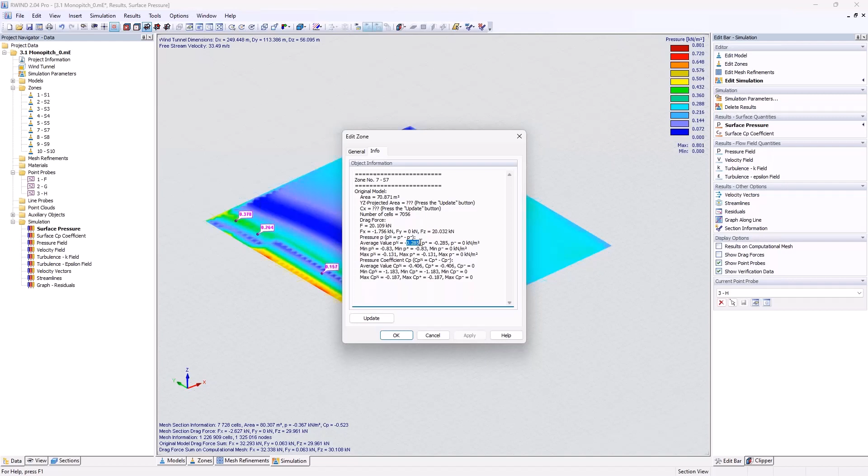We can see that we are, of course, away from the standard in certain areas, but you could also try to double click on a zone. Let's, for example, use zone number 7 and get the information about the average values inside the zone in order to double check them and compare to the standard.

So this is most likely the biggest new feature we introduced for you, in order to compare the stuff with experimental data.

So what you could also do is enter more probes, define more areas, and think about what verification interpolation you are going to choose.

So I was just about to jump into the point probes, but maybe my computer does not like it. Okay, so I was most likely even done with this. So let's continue with the presentation. I see I'm a bit ahead in time, but I think this is no problem.

So last but not least, the prospect of today. We of course try to constantly expand our database of verification examples. If you do not know, you can find them in our download area. There is the verification example area where you can filter for RWIND and RWIND 2. And there we provide already some validation. For example, the latest one, validation and a comparison to a Japanese wind tunnel database, where you can see that also, of course, zones were created and double checked and compared to the standard.

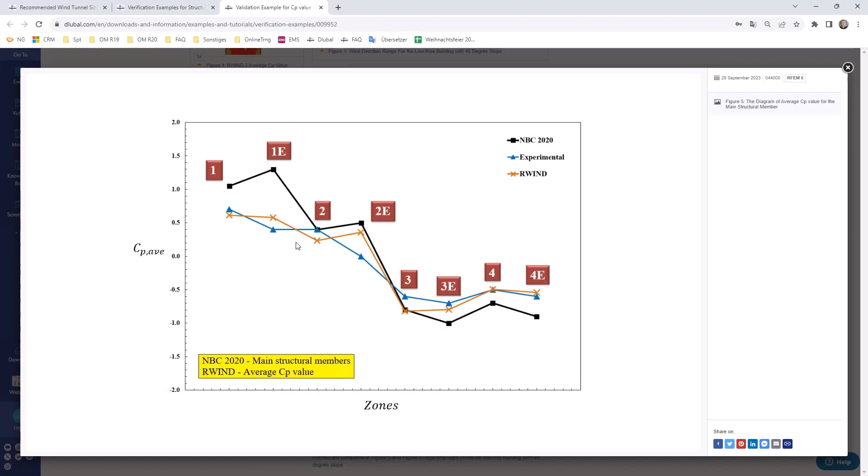Where is the experiment? Where is the standard? And where are we? So it's not about judging what is the correct result, I think, because nobody really knows what assumptions the standards really did in the past, but it's most likely just about to get a feeling: is my CFD model matching with the reality or not? And maybe I can even get lower values, which might be a bit more economical, but still on the safe side.

So you can find all the input values, and if you scroll down, there should also be the model to download. So you can already gather these models. Maybe if you have a similar model, put them into the tunnel with the settings we did, let them run, and then gather the information you may be curious about.

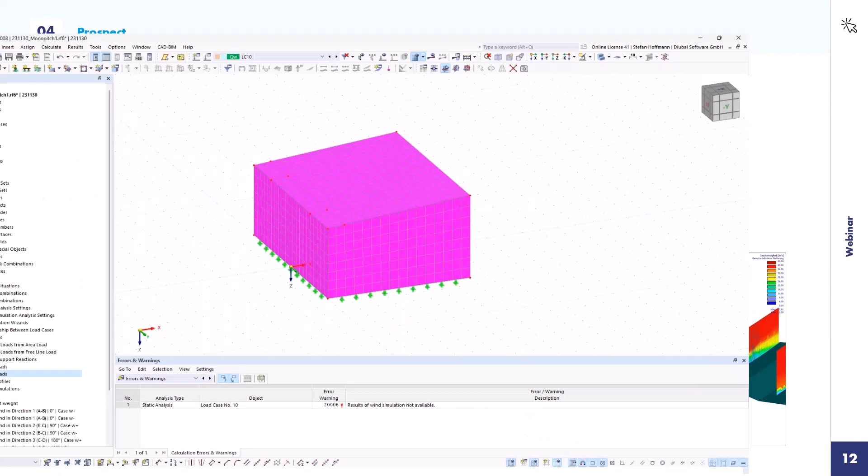What I did not show this time in the webinar is the connection of the results from RWIND to the RFEM GUI. What we are going to introduce more is that you can run RWIND as a solver in the background. There is a tab then in here, if you are in the wind analysis load case, that you can switch to the RWIND results. Currently, I think it's only the pressure and the Cp coefficient being drawn in over here in order to be evaluated.

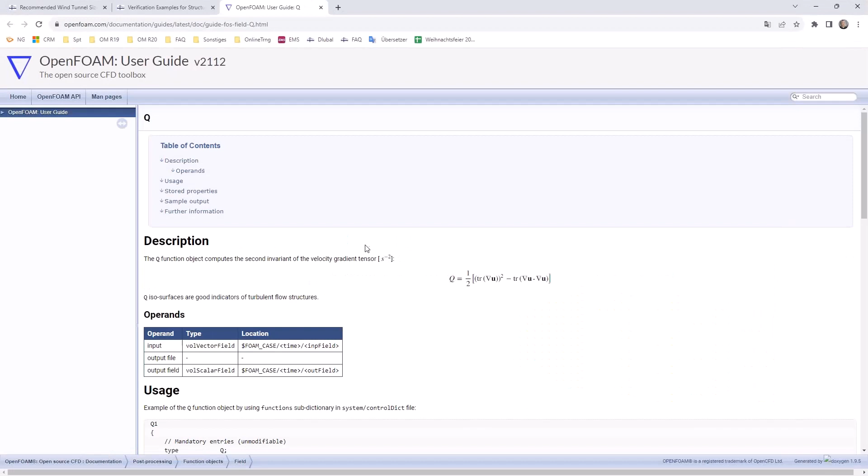We also plan, that's not fixed, the expansion of the result values as Q-ISO surfaces. I never heard about them yet, but I'm not that scientific CFD analyst. You can find in the OpenFOAM user guide information what this scalar field is about, and if this is useful for you to evaluate your model, you can check out these results hopefully in an upcoming version. And last but not least, beside all other planned features, we are planning to offer more wind tunnel scaling options that can be transferred from the RFEM GUI to the RWIND GUI.

All right, Andreas, so I'm a bit ahead in time, 5 minutes, but maybe you can close the gap and I would hand back over to you. Okay, thank you, Stefan, for this nice presentation about the current state of RWIND. And yeah, we're quite curious if the features are integrated in the program in the next time.